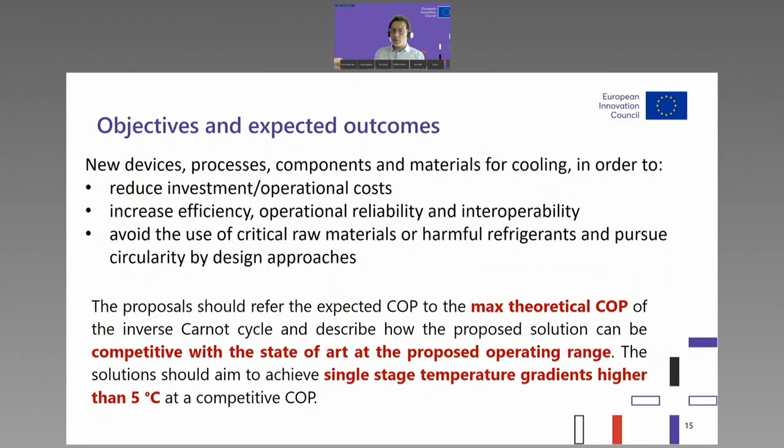and we aim to have solutions that can be competitive with the state of the art at the proposed operating range, and the solution should aim to achieve single stage temperature gradients higher than 5 degrees. So to have something that could really have an impact, and not only be relevant for a niche market application. Yes, I can go quick here and shift.

Some examples of what can be captured here. For instance, innovations in heat transfer and heat exchangers, from materials and topology of heat exchangers. There is research on additive manufacturing of heat exchangers, or processes for extrusion, or solid state cooling, innovative coolants for electronics and batteries, and other innovation regarding the improvement of evaporation or condensation processes, and to minimize space needs at the same time.

At components level, you can investigate areas such as wet compression and combined pumps and compressors for heat pumps, use of phase change material substrates for electronics and batteries, or areas such as electrodynamic acceleration of dielectric media that are implemented in data centers and electronics.

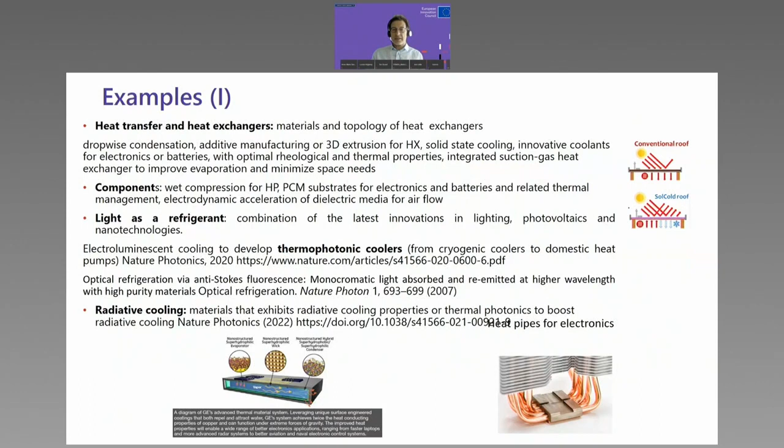Some other examples could be related to refrigerated transport, for instance, using trucks fed by liquid air, liquid nitrogen, or cryogenic expansion engines.

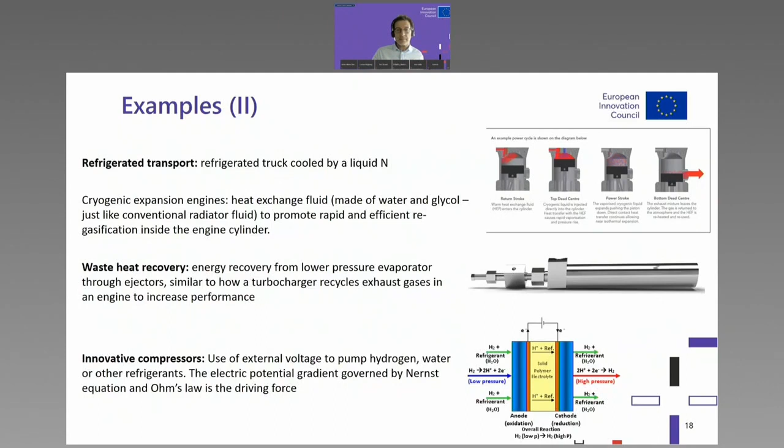The dimension of waste heat recovery combined with cooling is also important. I mentioned before heat transformers, and solutions that can recover the heat rejected in cooling processes are also in scope, and for instance innovative compressors that can use external voltage to pump hydrogen and so on. These are some examples, and other examples here are taken also from some new technologies also explored and funded by EIC among the other funding institutions.

For instance, wet compression with integrated compressors that can operate with wet gases and reduce the number of components in heat pumps. It is clear that the combination of storage, in particular thermal storage and heat pumps, could increase the overall efficiency of the process, and this could be also captured together with the use of cooling to increase the flexibility of energy systems and as electricity or energy storage medium.

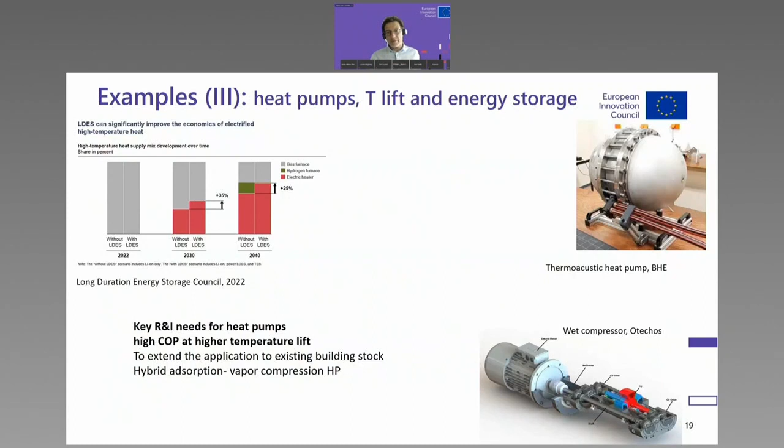Also, applications such as thermoacoustic heat pumps that could offer higher COP at higher temperature lifts could be promising and are quite, let's say, novel, even if the technology is already well known, but not applied specifically to applications for buildings at large scale level. I would like to add something on the process for submission.

So we have an evaluation that is composed of two steps. Step one is related to the individual project. So a number of remote evaluators review the proposal. Then we have cross readers that check the consistency of the evaluation of each remote expert to see if there are discrepancies, and everything is done on the single specific project, assessing excellence, impact, and implementation with specific weights, as we will see soon after.

And only after having evaluated the single proposal and assigned a final score in step one, we go to step two, which is the ambition to build a group of retained projects, a portfolio that can collaborate and address diversity, in the sense that we want to capture possibilities for different technologies and not support only one technological area. So we want diversity, but we also want to guarantee that these projects can have something in common, can cooperate, can build synergies, and can achieve more ambitious results together.

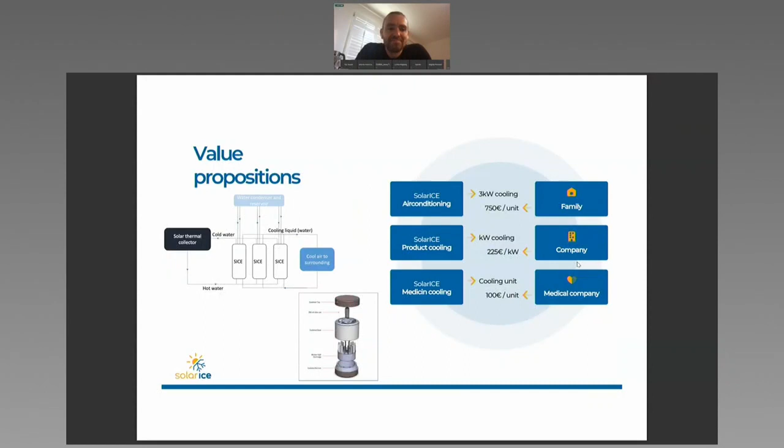Thank you, Leon. The next presentation is done by Martin Buchholz. Yes, hello. Thank you for giving me the opportunity. Martin Buchholz from Watergy, a company from Germany, from the Berlin-Brandenburg region. Can you show the slides?

So, I see still the last slide from the previous. We see them, yeah, Martin. Okay, sorry, I can switch to the slides that I can see.

Okay, so we have a small research and technology-oriented company. We are one of the few institutions in Germany working on open absorption processes. That means we work on a liquid desiccant. These are hygroscopic salt solutions, and we work mainly on the absorber elements you see on the left, and working on new configurations of that.

We focus on cooling, but it's also full climate control for buildings, so it also has a heating component, and we also have a focus on industrial drying. But here in the Pathfinder, we would like to focus now on a specific idea for the combined evaporative, sorptive cooling. Next slide, please.

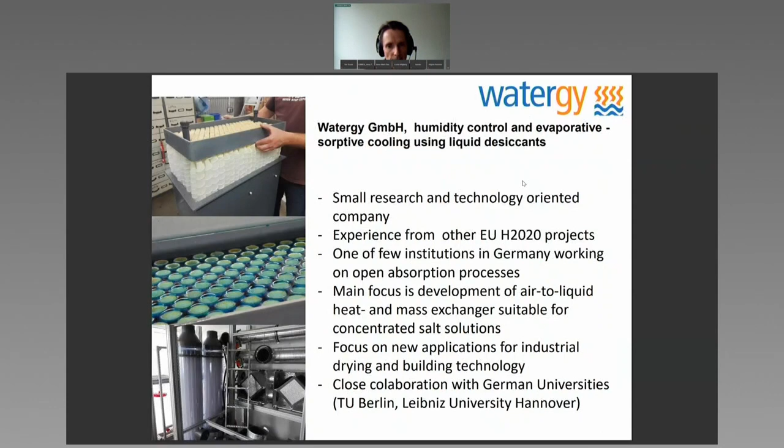And the idea is that the evaporation provides the cool and the absorption provides the dehumidification. It also includes a kind of heat demand for the regeneration. So we are a bit similar to the previous application. And there is a lot of competition now in this field because there are big potentials for energy savings, let's say 40 to 80% less than a standard cooling technology.

This is for sure. I know at least two US companies who work on innovative approaches with high investments, actually, and there is a competition for the best solutions, of course. Then we would like to integrate a PCM day-night heat storage. So the idea is to collect cool from the night and to collect heat from the day for the regeneration process. This could be a partnering company or institution which could support this part.

We also think about heat sources like, for example, a solar hybrid collector could be a partnering device, but the heating source is not really crucial for the innovative process. So that could be also something we get from just buying some components. But of course, it would be nice when there is a very good innovative idea from that field to combine these solutions. That's also very interesting.

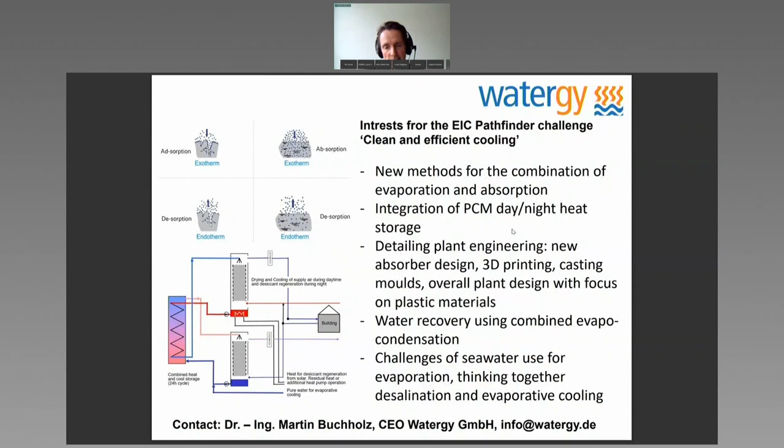And then finally, we look at water recovery. So if we work on evaporative cooling, we create a lot of water vapor, and water is also a limited factor. So technology to recover the water back by condensation, and also maybe the implementation of seawater. Wrapping up. Yes, seawater. And if there is any company working on the chemicals for seawater use in this field, it would also be an interesting partner.

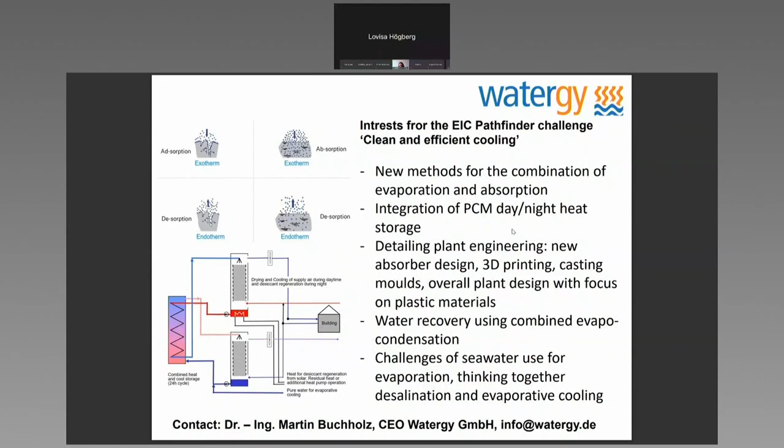Thank you. Thank you very much, Martin. The next presentation will be done by Virginie and Metacool. Virginie? Virginie, can you hear us? Virginie? Yes, we can hear you, Virginie. Do you hear me? Yes, please go ahead.

Okay, I'm sorry. So I'm Virginie Ponsinet, and I come from a CNRS research institute in Bordeaux, in France. I speak for a multidisciplinary team of 7 researchers that identifies itself as Metacool. We are experts in advanced materials with innovative design, mostly based on polymers and inorganic particles, with tailored nano and microstructures to provide specific functions beyond the state of the art.

So we have been in particular aiming at controlling light-matter interaction in metamaterials using tailored optical resonances. We have also produced nanocomposite fibers for energy harvesting. Our team displays a wide panel of competencies ranging from electromagnetic simulations for materials or metamaterials design to different fabrication and shaping methodologies involving self-assembly and other soft matter processes.

We have the expertise and equipment to produce particles of different natures, including complex ones, as well as different smart composite materials. We use an array of structural and functional techniques to assess the performances of the produced materials and to relate their structures with their properties. We wish to contribute, so we can move to the next slide.

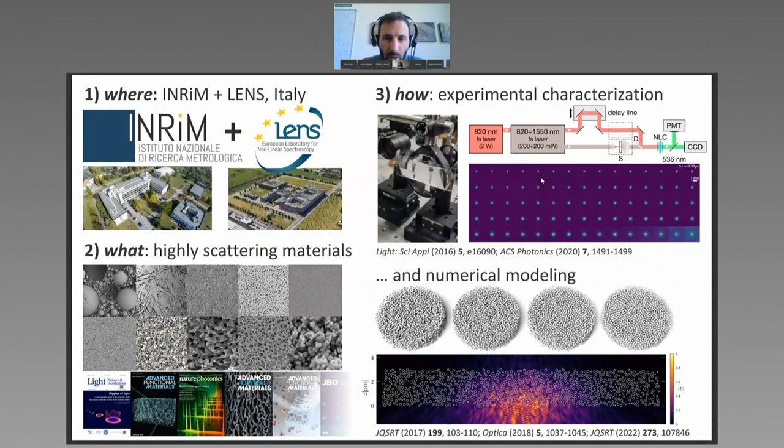You can go to the next slide. So as we just heard from Virginie, and many of you know, one recent and rapidly growing application of highly scattering materials is that of sub-ambient passive radiative cooling, because these materials are highly reflective in the whole solar range. In the past few years, we have published a few papers on this topic together with collaborators from the Chinese Academy of Sciences and the Harbin Institute of Technology. And we are currently working on the characterization of the sub-ambient cooling performances of these materials under realistic conditions.

Let me mention that our activities in this field are supported at the moment by a partnership of other European metrology and research institutes through the parametric project, which I am coordinating, and which aims at developing standard figures of merit and reproducible protocols to evaluate the potential cooling power of these newly proposed materials. This point on standardization was also mentioned by the program manager earlier. And we think it's very important because there is almost a reproducibility crisis at the moment in this largely and quickly expanding field.

So as regards this EIC challenge, we intend to continue exploring porous materials which combine both high scattering efficiency with strong thermal insulation in order to protect the infrared emitters from both radiative and non-radiative heat gains, which at the moment we think represent one of the major bottlenecks for both nighttime and daytime passive radiative cooling.

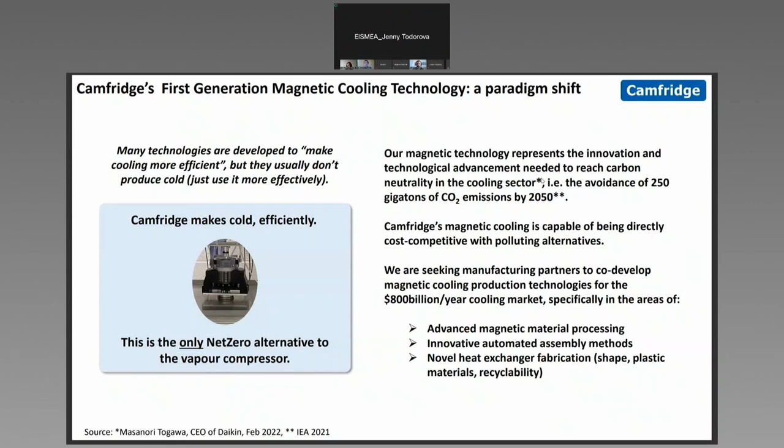Thank you. Hello, my name is Albert Castell. I'm a professor at the University of Lleida in Catalonia in Spain, and I also speak for a research group of different professors. We have mainly backgrounds in industrial engineering, chemical engineering, and architecture. We have deep and long experience in working in the International Energy Agency, in tasks, annexes, in European projects, for example, in topics such as thermal energy storage, mainly with phase change materials, and combined renewable heating and cooling.

And currently we are active in several national projects on the topic of what we call radiative collector and emitter, which is a concept or a new technology combining two technologies, radiative cooling and solar thermal collection, in a single, let's say, device or concept.

Okay. We had a first concept and technology developed to TRL5, but this was using nighttime radiative cooling, which was less challenging. And now in this proposal, we want to move to a much more challenging concept that has more potential of breakthrough, which is using daytime radiative cooling combined with solar thermal collection to produce both hot water and cold water. So at this point, we are looking forward to finding interested partners for this proposal. So if we go to the next slide, please.

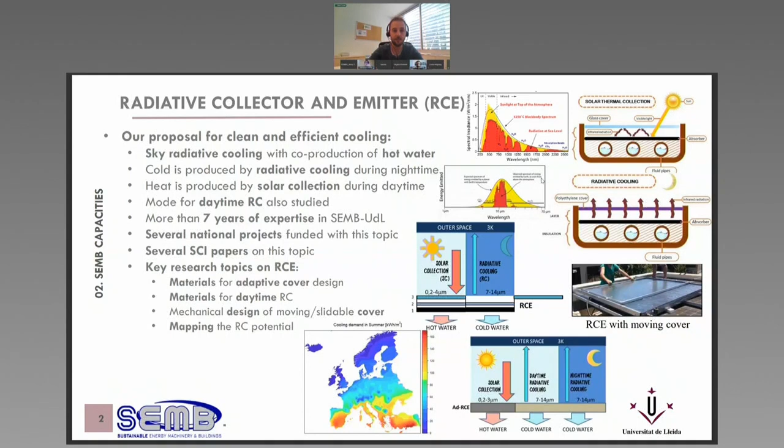We looked at demands on buildings, application on buildings, and it can be useful for the current climate situation, and we also analyzed it for future climate change scenarios, and we see that the potential of radiative cooling is robust and it's a resilient technology for the future. So we are looking for potential partners, as I said, mainly on materials probably, that want to join us in a project. Thank you.

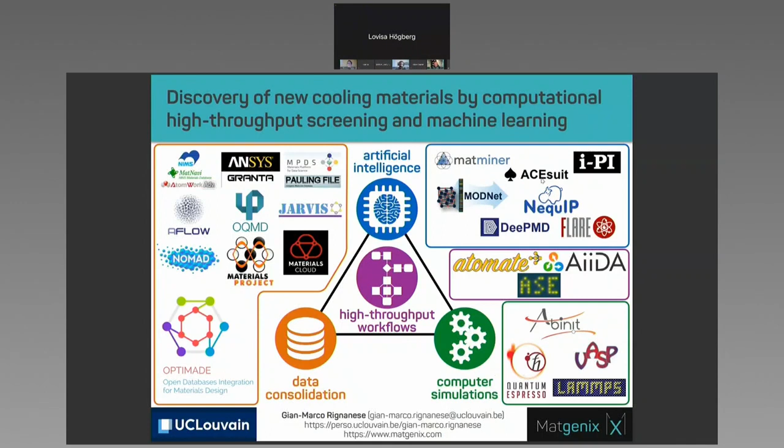Thank you very much. Thank you very much, Gianmarco. So next presentation will be done by Ioannis Papakonstantinou. Ioannis, please go ahead. Yes, hi everyone. So I guess there is no animation because my slides have some animation, never mind.

My name is Ioannis Papakonstantinou, I'm the head of the Photonic Innovations Lab in the Department of Electronic and Electrical Engineering at University College London. And I'm going to talk about radiative cooling, a subject that was also covered by some of the speakers before. The idea here is you have a surface that combines high solar reflectance and high emissivity, particularly in what is known as the mid-infrared transparency window between 8 and 13 microns, and the combination of the two can achieve

net cooling. And as a matter of fact, we have a project funded by an EIC proof of concept called Polycool, whereby we have developed some solutions that we can spray or dip coat or even convert into polymer films. And we have seen radiative cooling to about 4 to 5 degrees below the ambient. Can we move to the next slide, please?

Okay, building onto these, I'm going to propose two concepts, actually. The way I see radiative cooling moving forward is the following. First of all, in climates like temperate or continental, which we have in Europe, static cooling is certainly not the solution, because what tends to happen is what's known as overcooling. So you have the cooling operating during the winter, and that imposes a penalty for heating. So what we are proposing here is a self-adaptive radiative cooling solution. And as a matter of fact, we have some prototypes.

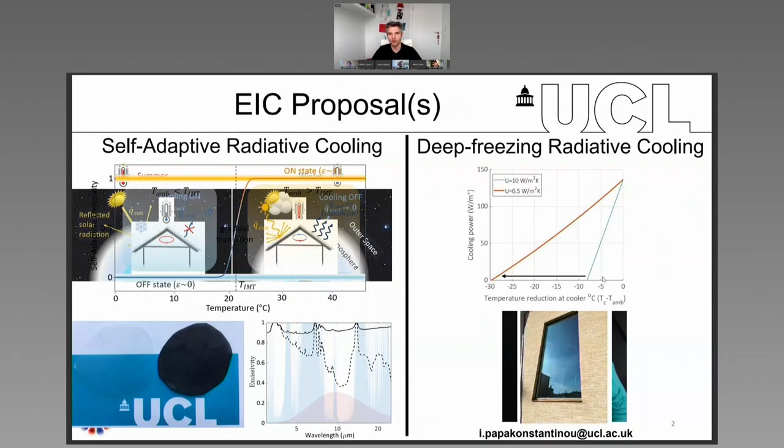What we would be looking for in terms of partners is partners with experience in vacuum insulation technologies, partners with experience in heat transfer, partners with experience in scalability. How can we scale up these concepts? And of course, industrial partners that can look into applications such as, for example, cooling of data centers, cooling of refrigeration trucks, and so on. So thank you very much.

Thanks a lot, Ioannis. Next presentation will be done by Lovisa Högberg. So Lovisa.

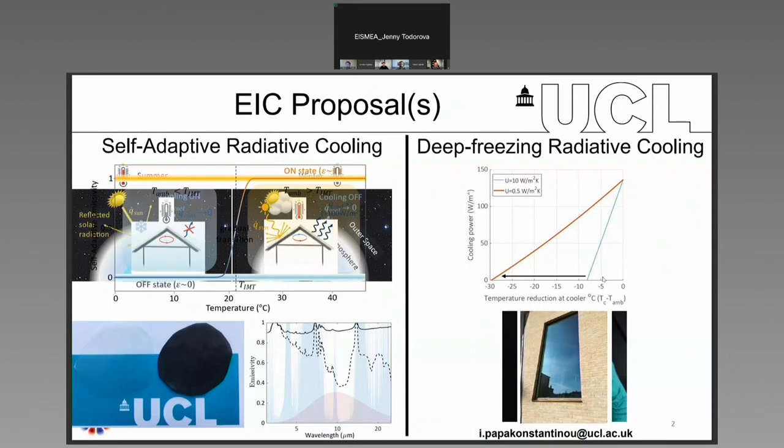My name is Lovisa. I'm leading the commercialization of Sutrusion, which is a completely new and patented 3D manufacturing technology. So in short, what we are doing is that we're solving the problem with high cost of production associated with producing complex 3D structures needed for lightweight optimizations and cooling topologies.

We've managed to achieve a 6-minute charging, both in simulation and live test, from a 20 to 80% state of charge, with a nice and even temperature, no overheating in the cells, which means a longer life of the battery cell, an estimated increased lifetime of about 2 to 3 times, which we are very happy for.

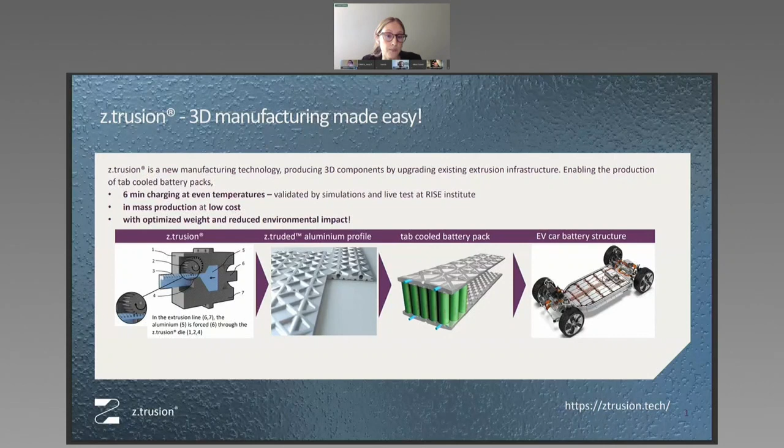So basically, we offer the ability to mass produce highly efficient tab-cooled battery packs and in general complex 3D cooling structures. The ability has granted us funding from the European Innovation Council of 6 million euros total. And we are now accelerating this technology towards battery pack manufacturing with OEMs and experts.

And we are now entering a collaboration phase where we will set up the first of these profiles in our tech center in Sweden. We will iterate together with OEMs and experts who can set the requirements and goals for the project, to make this technology and battery designs really automotive ready.

So basically in the near term, there's an opportunity, of course, to be part of this project. The benefit would be to have a front row seat of a completely new manufacturing technology, get a head start in applying this type of manufacturing in battery pack designs, and improve charging and battery lifetimes.

But we are also looking for partners in other thermal management and cooling projects. For example, we are now working in a fuel cell project where we will produce the world's first bipolar fuel cell plates with z.trusion by the end of 2023. So we are very open for any dialogues with experts in cooling and fuel cell plate design, etc. for this type of project.

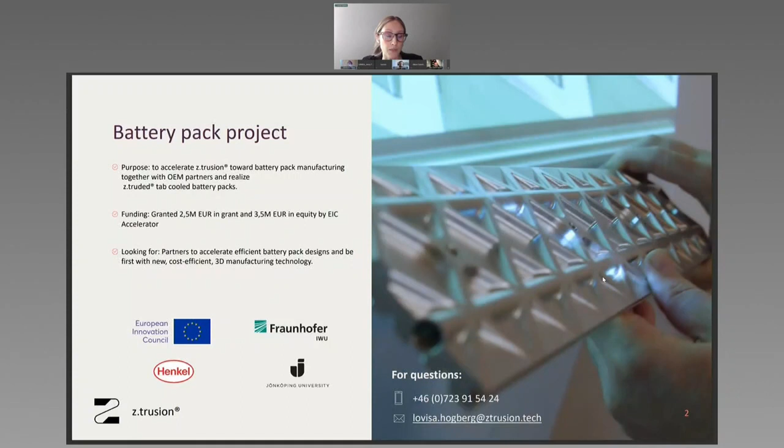I'm a professor at Saarland University, and the partners for our proposed project are two more universities, one in Italy, in Naples, and one in Slovenia, in Ljubljana. And we have an SME, the company Exergyn in Ireland.

Our idea is to use decentralized elastocaloric climatization systems, especially for the building sector. So this would be the use case we're envisioning and we want to attack. And all of the 4 partners have extensive experience in the field of elastocalorics, following different research approaches regarding systems, materials, and system design and energy transfer strategies.

Why is it important? We saw it also in the talks before. The building sector, or in general, cooling is going to have a hugely increasing demand over the next couple of years. And this is something we need to attack.

Elastocalorics offers a very high potential of attacking this problem because of the huge energy efficiency that can hopefully be reached, and the zero global warming potential that goes with it, because we don't need cooling agents.

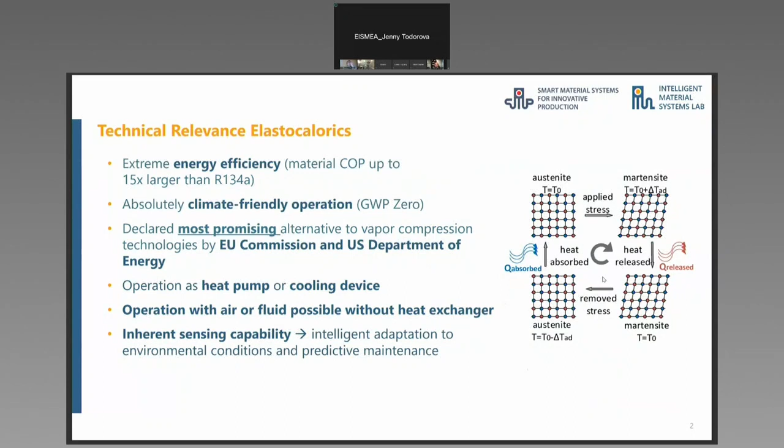Hello, everyone. My name is Yair Sued, and I am the co-founder and the CEO of Sphere Technologies. Sphere is a startup company located in Israel, and I want to present to you our disruptive cooling technology. By figuring that the main component that influences the energy consumption in the cooling cycle is the condenser, we have developed an innovative one that rejects the heat in a unique and patented method.

The main advantage of that system is the energy efficiency. In this system, the electricity consumption is at least 50% lower. Another important issue is the system size. The footprint of our system is 4 times smaller, so the consumer can cool more in a smaller area. Those significant savings in operation costs are not the whole story. Look how we reduce emissions. Every system in the size of 10-ton refrigeration saves 25 tons of CO2 per year. So besides the savings in operation costs, you will increase your impact.

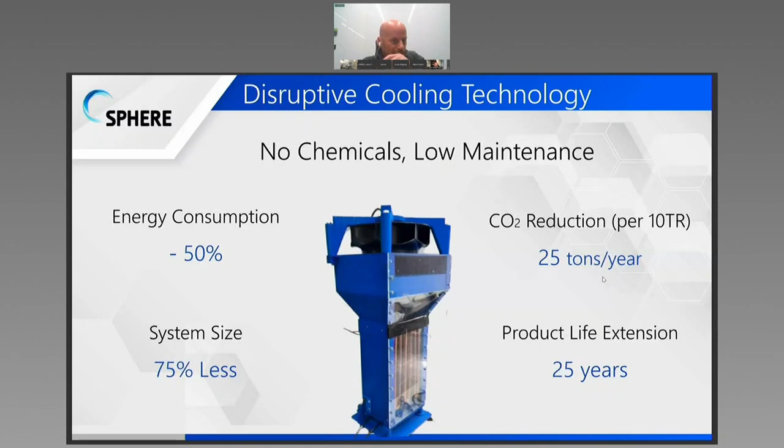Next slide, please. Since we recognize that the need and the pain in the industry are the greatest, we are starting with a modular 10-ton cooling system. We signed and started a pilot with Bazan refinery on an industrial process that they managed to cool with limited efficiency, and now it is under construction. We are going to reduce the electricity expenses in that process by 40%, and in addition, significantly increase the cooling output since the process is closed for the summer months.

But industry is just the beginning. We are able to implement our solution in every cooling system in any size. The process of expanding after this pilot with Bazan will be through the execution of 3 more pilots and then expanding to the EU using a strategic partner. So if you want clean and efficient cooling at your data center, building, or for your food, I invite you to contact us and see our solution in action. Thank you very much.

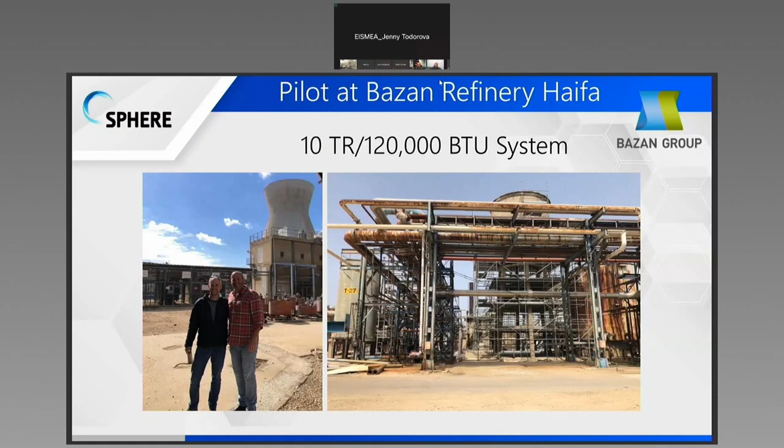Thanks a lot, everyone. It was great to have your presentations. Anne-Marie and Marco, the floor is yours. Well, I don't have so much to add, other than I'm very happy to see these very interesting ideas. I knew already some of them. Others are well aligned with the inspiration and the topic of clean cooling. So I just have to wish you all the best.